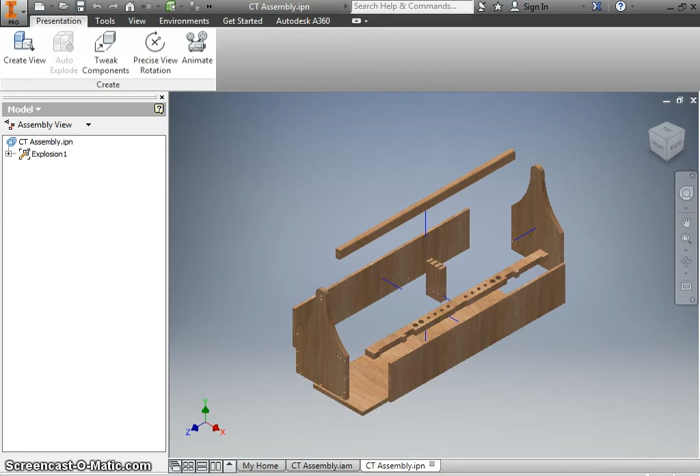Alright, let's move on to making our drawing files. This time, instead of using A-size paper, we're actually going to use B-size paper, so we have a little bit more to play with. B is 11 by 17.

Let's put our base in here. We'll get an isometric of our exploded view, and we'll make this a quarter scale. Let's drag this over here so it looks nice. Click OK.

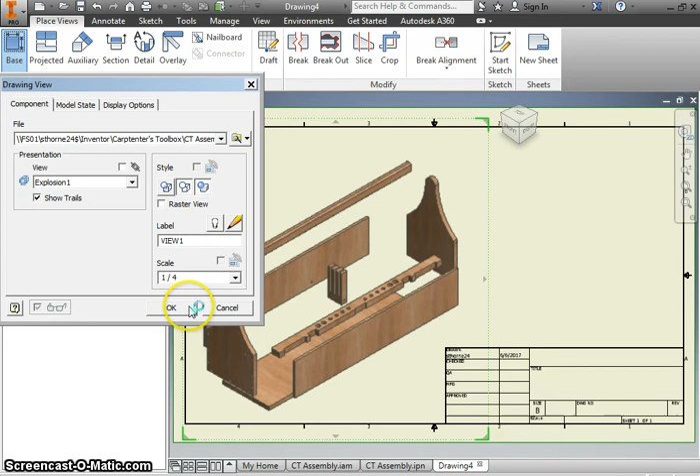And let's also make an isometric view of our assembly file. We'll scoot that over here. Make sure that's shaded. That looks good.

Annotate. We're going to drop in a parts list. We'll use the assembly file, and we'll scoot in the items and the quantity. We'll save the description for later, and scoot in the part number some though.

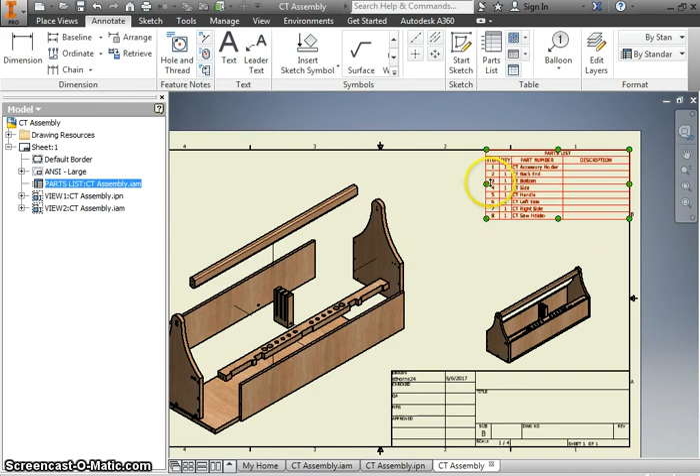Okay, let's add balloons. We have a handle, left side or right side, front side or back side, another side over here, our saw holder. Try to make all the balloons about the same height.

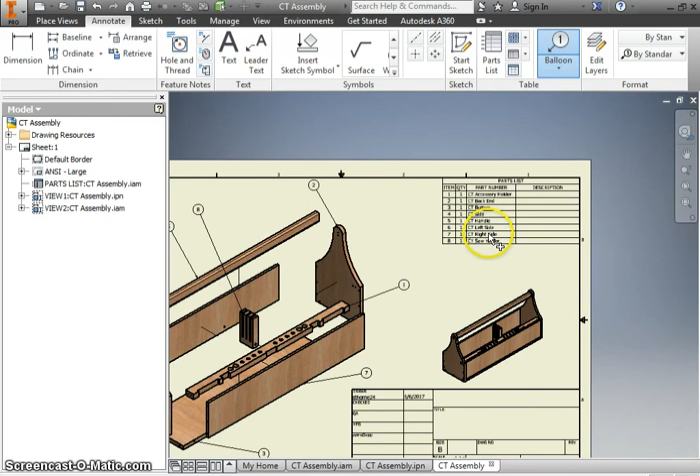So there's 1, 2, 3, 4, 5, 6, 7, 8 things here. That all looks right. We are going to add in a couple of descriptions.

For example, the accessory holder came out of a 2x4 originally. The back end of this thing is 5/8 inch ply. The bottom is 3/8 inch plywood.

Side is actually supposed to say front end, but the wrong file came in, so we'll make that 5/8 inch ply as well. Handle came out of a 2x4.

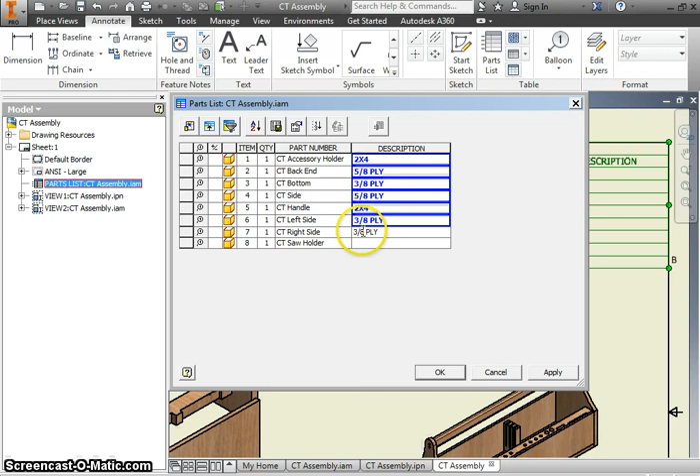Left side is 3/8 inch ply. Right side is 3/8 inch plywood. And the saw holder also came out of a 2x4.

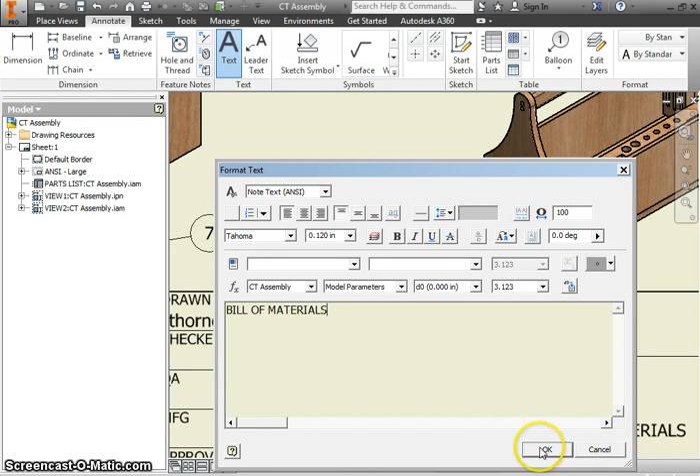There we go. Let's add in our name. Add in bill of materials. This will be all the materials you would need to make the project.

And now we can start to add new sheets. We'll start with one of the side pieces here. I want to make sure the countersinks are facing us, so they should look a little bit bigger.

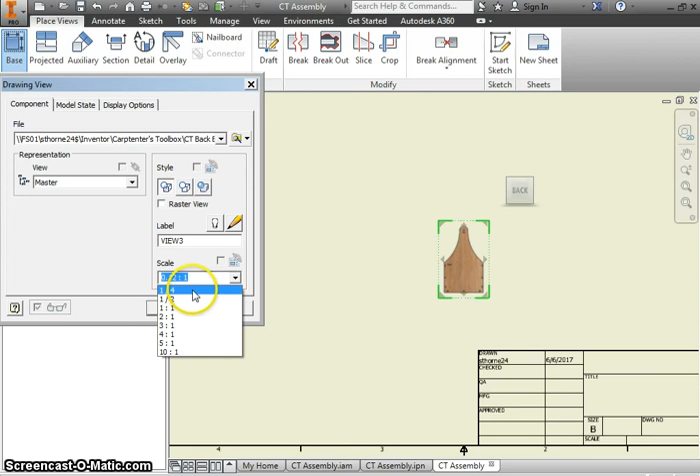What does half scale look like? Half scale doesn't look too bad. We'll try that, and if we don't like it, we can always change it.

I don't like how big this title block is though, so I'm going to delete the title block, go back into drawing resources, and choose a smaller title block. That'll give us a little bit more room.

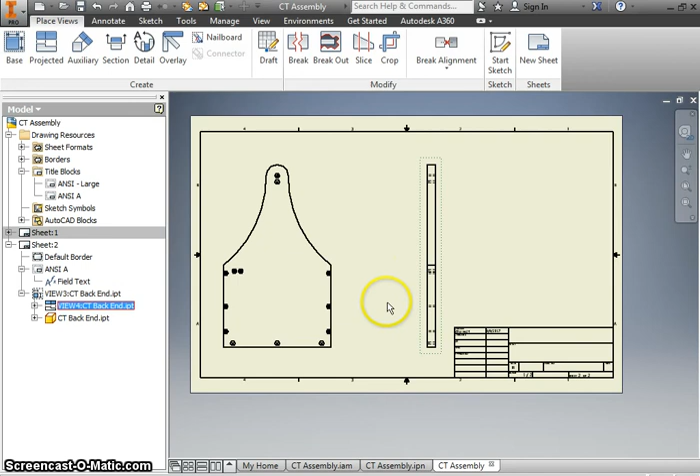And let's go back to annotate. We want to show, before we can annotate—let's put in some center marks here. These are annotations. I shouldn't say before we annotate; this is still annotating.

But if we have where the centers of the circles are, then it's going to be easier to dimension.

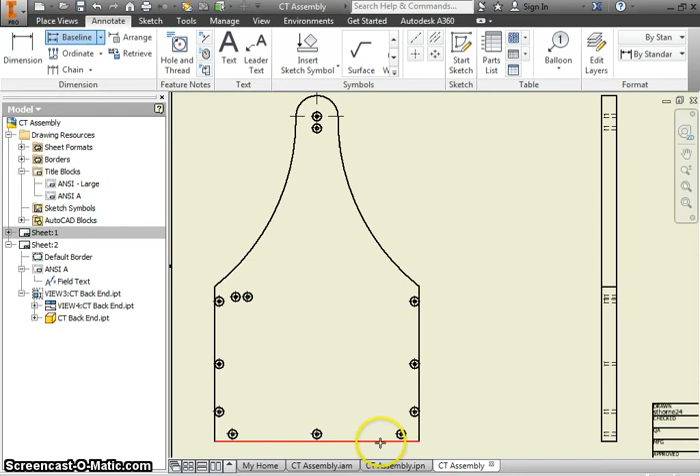And let's cheat a little bit and use baseline dimensions. So you click on a baseline, this one, then you click on each of the things after it that are of interest to you. It's not going to let me click that one, but that's okay. Right click and hit continue, and it should space them all out for you.

Like I said, it didn't quite do what I wanted it to with one of them, so I'm going to scoot some of these guys in.

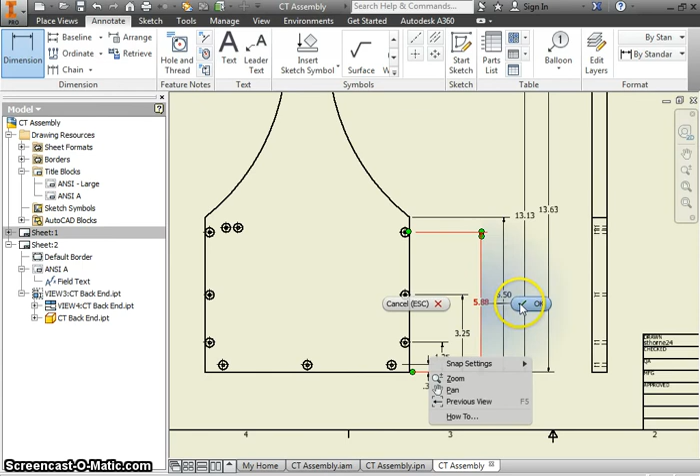I want to know where that point is. 6.5. Cool. You may notice that this is going like 0.31, 0.125, or do something a little bit different. In the wood shop, you are not going to have a ruler that measures out 0.875, and it's not going to be that accurate.

So instead, we're going to display our dimensions differently. If we go to Edit Dimension Style—I think this is the right one, we'll see—we want the format to instead be in fractions. We'll do fractions diagonal, because that looks nice. It'll go down to the 1/16 of an inch.

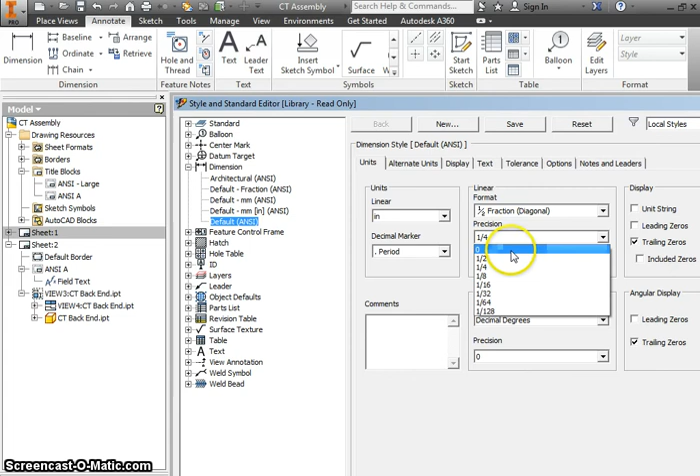There we go: 3 1/4, 5 7/8, 6 1/2, 13 1/8, 13 5/8. This all looks good.

We do need to know the radius of each of these. See how long this is? It doesn't look quite right. If you right-click on it, hit OK first, then right-click and go down to Options. You can say Jogged Leader Line, and then it doesn't go all the way out to where the center point of that would be.

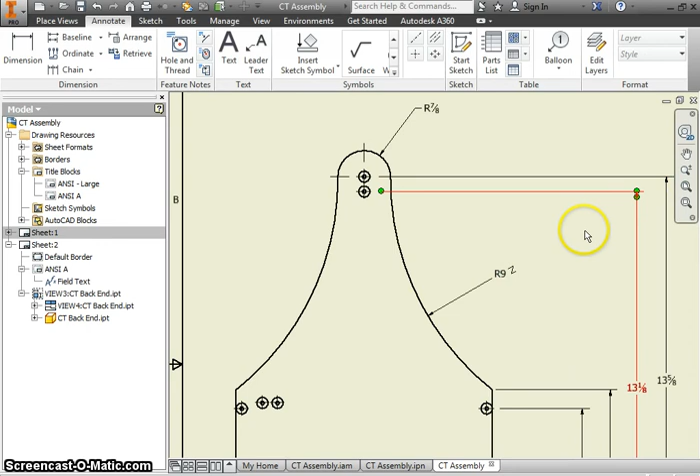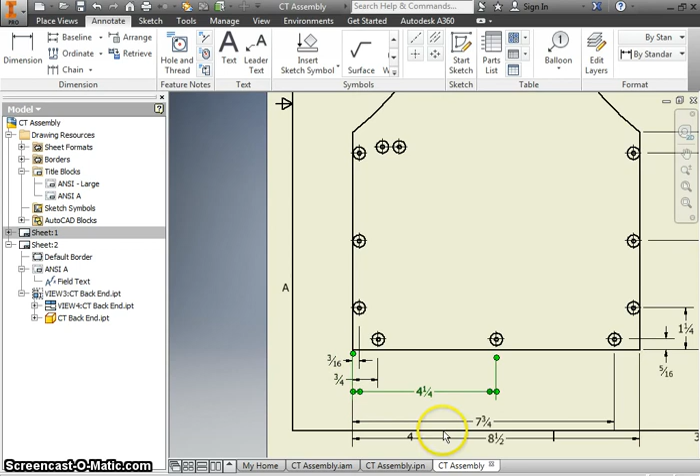Let's go with the baseline dimensioning again. We'll choose this as our baseline. Right-click and hit Continue. It's just off the page, but we should still be able to scoot everything up and have it look decent. And if not, there's still a little bit of space up above it too. Try and make this look good.

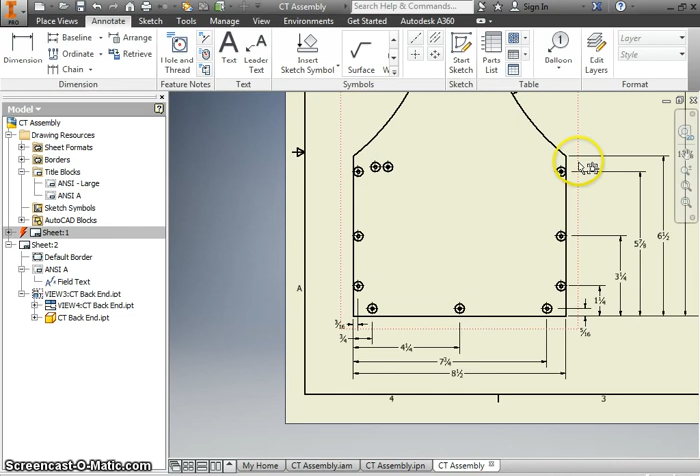Now you notice that these holes are a little bit higher than this one. I didn't want to drag that all the way across, so I'm going to put a dimension on this side instead, just saying what the height of those two little guys are.

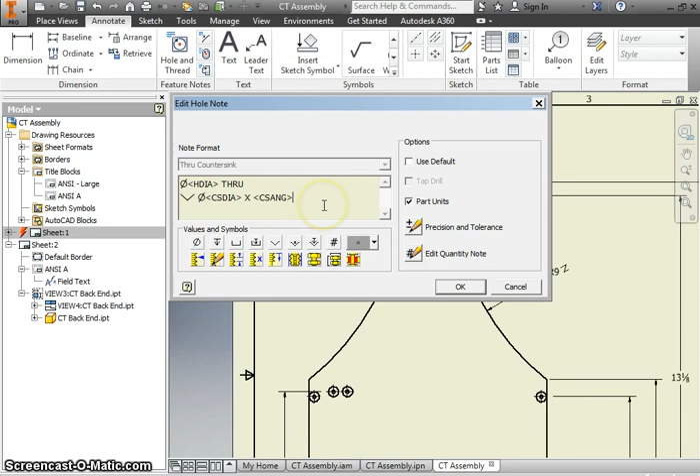And we need to show that these are all countersunk. So to do that, give a hole and thread note. Probably looks better on this one, honestly. We're going to add just a little TYP after it. That stands for typical. That means that all of the holes you see on this are going to have that same hole type.

So this reads that's an 1/8 inch diameter for the little hole, this one right here. And then it has a 3/8 inch diameter on the outside with an 82-degree countersink. And that's typical for all the dimensions.

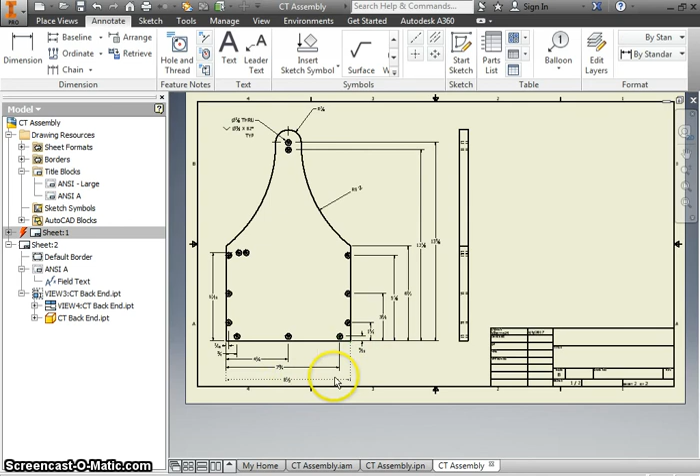Okay, so now I know how far everything is. Oop, I just saw something we missed. Let's add one more dimension in there. And if your dimensions start to get too close together, it's okay if they're not in the middle of the line. You don't want them running into each other, so I'm going to offset them a little bit so I can read them easier.

We do need to know how thick this whole thing is. And I'll put that there.

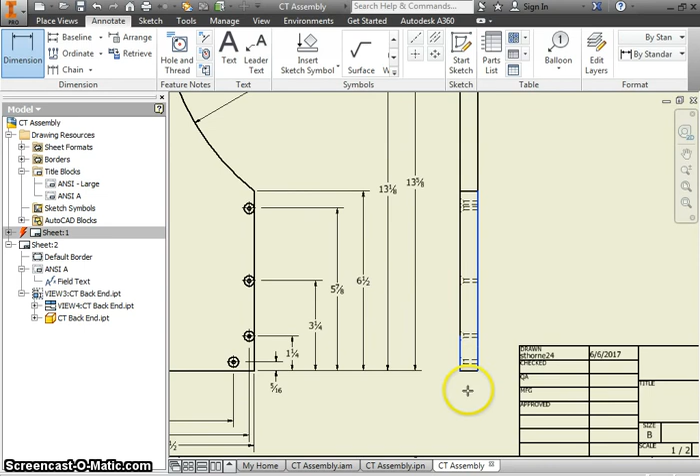Put in your name. This is the back end. See that there.

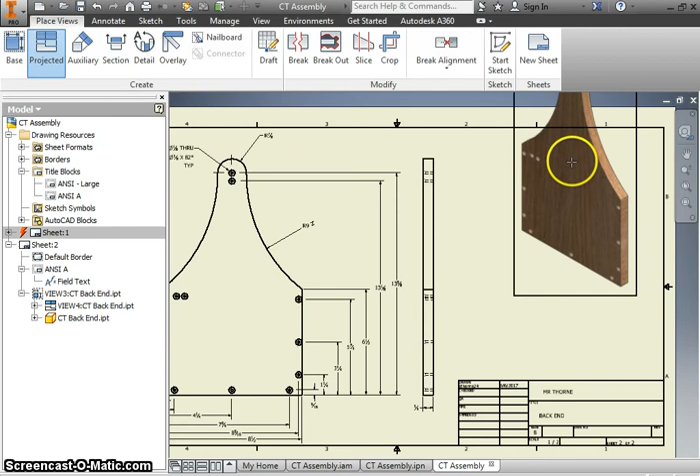And it probably would be nice to have an isometric view. So I'm going to go Place Views, Projected, click on this, up a little bit, hit Create, and make that shaded.

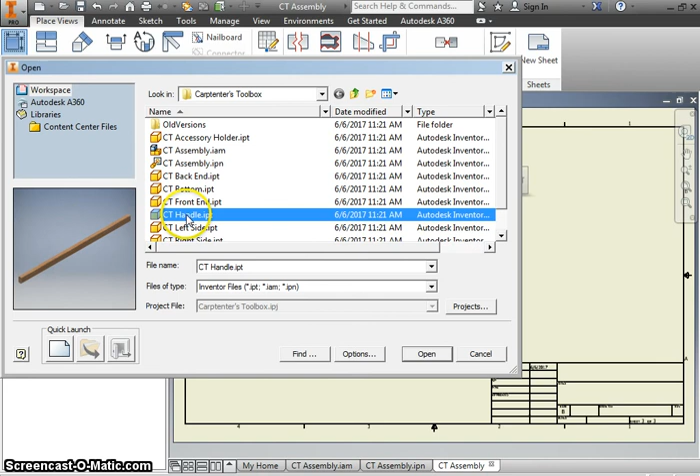Okay, next, so we'll say New Sheet, Base, it's going to be - well, let's do the accessory holder. That one's a fun one. See if we can get away with a quarter scale for this. I think we can even do a half scale. That would look alright. Let's do half scale.

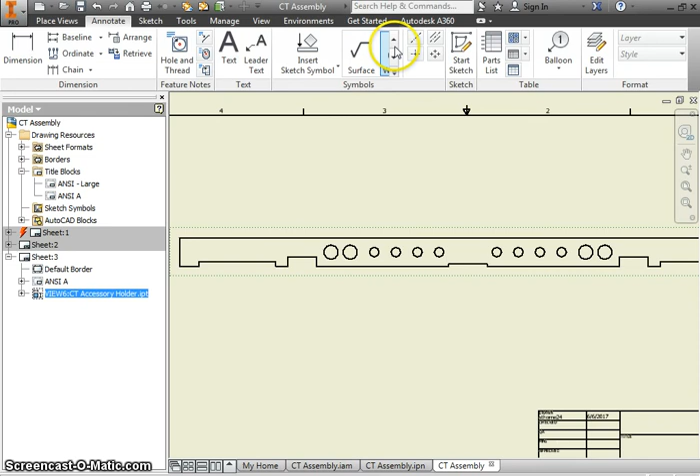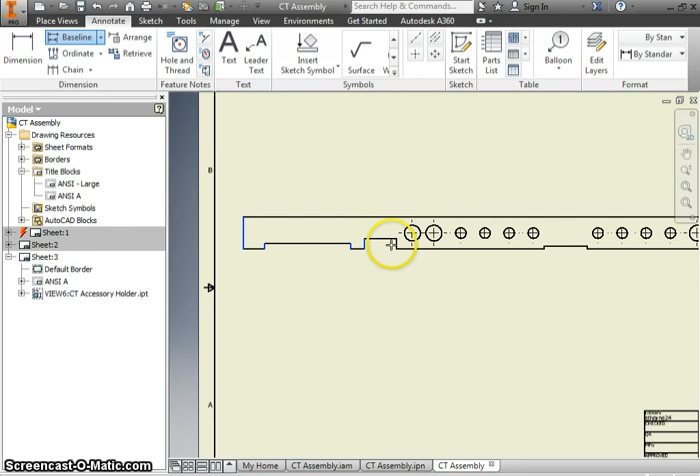Put in our center marks before we do too much else. Baseline dimension again, click on a base, and then every feature - it's not going to like that. Every feature after that, go through and click on that as well.

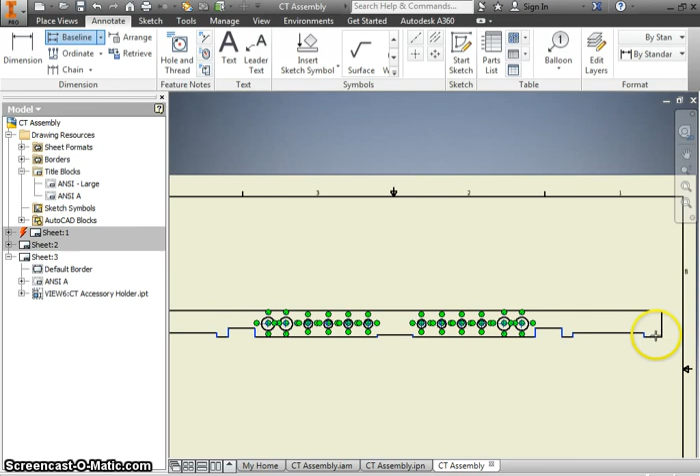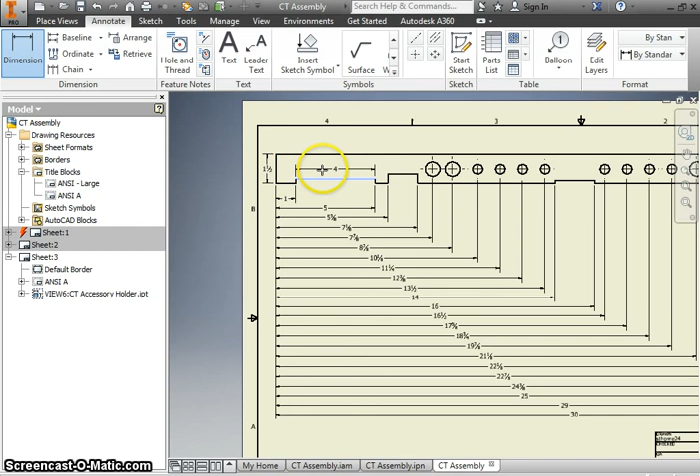Looks like something we need to scoot up a little bit, doesn't it? Okay, those should all be readable. Let's add a couple dimensions on here. 1.5. Normally we try and keep our dimensions outside of the object, but in this case it's going to make it a little bit more clear.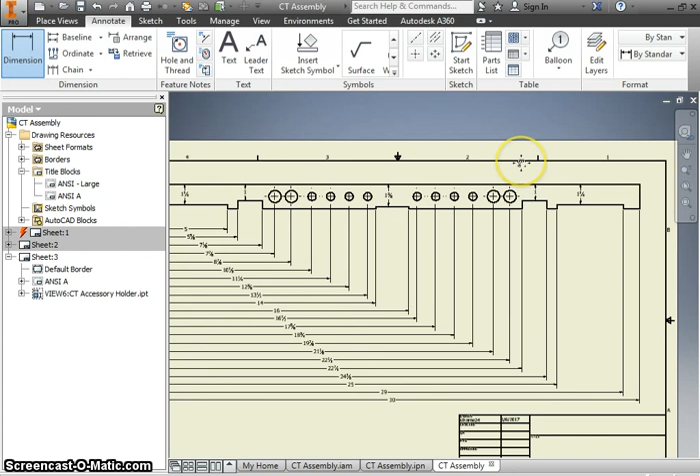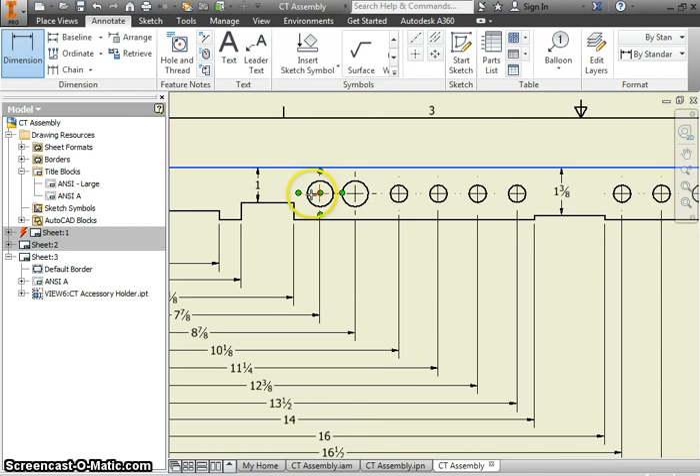And let's put in one more for the holes on this. Yeah, let's try again. We'll add a TYP note after that as well.

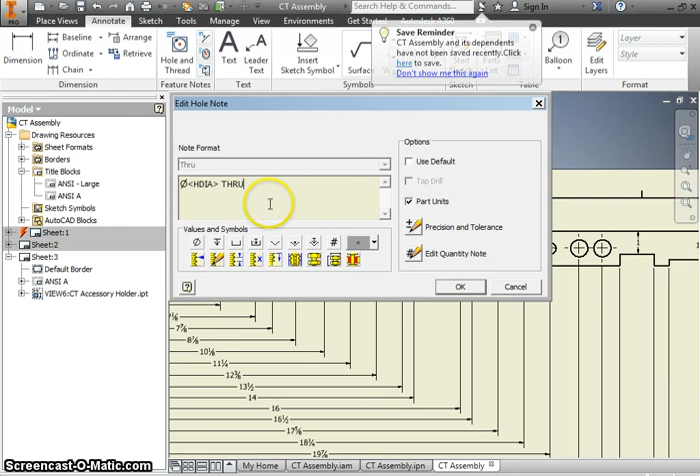Okay, we're going to say this is 1, 2, 3, 4 of those, through times 4. And our half-inch ones are 1, 2, 3, 4, 5, 6, 7, 8, times 8. So this means how many of those holes you can expect to find.

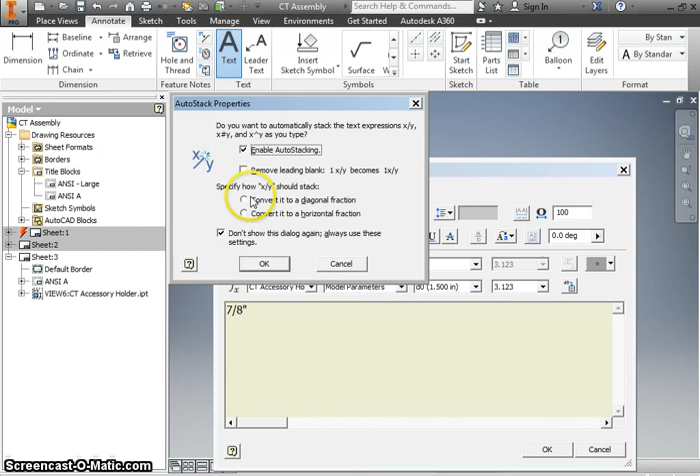Let's add a note on here for thickness. And this is a 7/8 inch thick part. So we'll say 7/8 inch. Oh, I don't like that. Oh well. Thickness. And let's actually add the word note right before it.

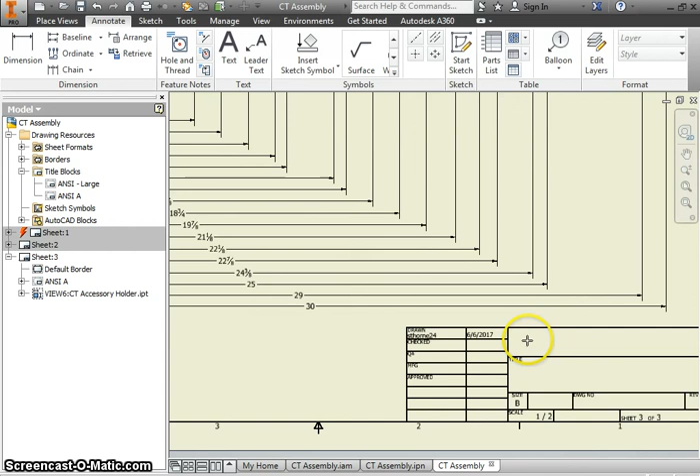Put in our name. This is the - 2 S's there - accessory holder. Has a scale already.

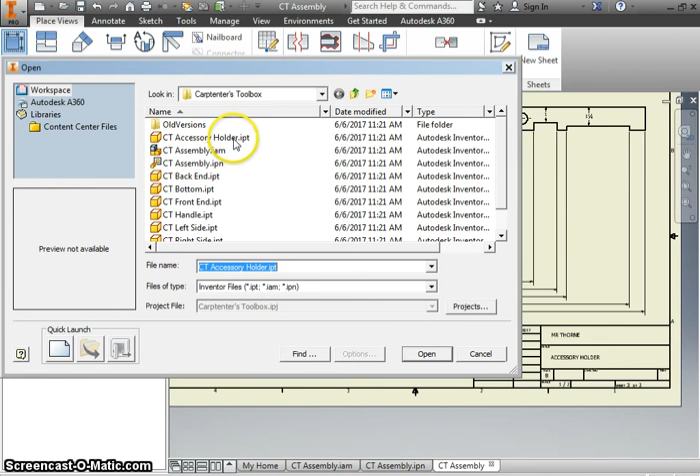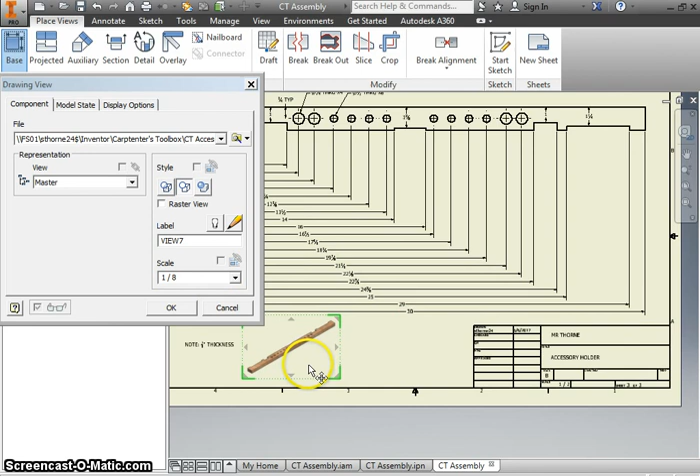And it would probably look a little bit nicer if we could put in a quick little isometric view. It would just have to be a little bit small, smaller than a 1/6. Let's try an 1/8. Yeah, okay. Oh, let's make that shaded though.